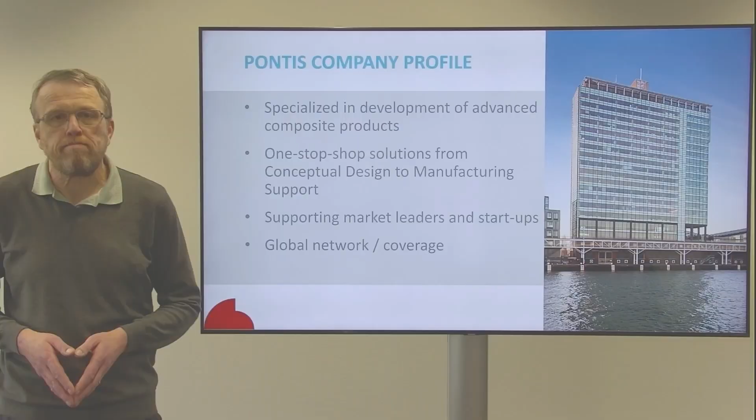Now to the subject of our lecture, composites in mobility, e-mobility in more detail. We are looking at composites that have been successfully applied into the passenger car market for load carrying structures, but also interior panels. But often that was at the high-end part of the market, with the more expensive cars, which could afford to have more expensive materials used for performance reasons.

Recently, BMW has developed the i3, which was a more affordable car and which was produced in larger volumes, which also was quite successful in reducing the weight of a car. It took 30% of the weight compared to a similar vehicle, and was able to achieve quite a lot of CO2 reductions over the lifetime of the car. But a lot of lessons were learned from this development, so it's not finished there yet that we all know that everything can be applied.

Lessons learned from the BMW i3 is that cost is still an issue. There's still a challenge in the industrialized process. A lot of compromises had to be made to implement composites in the car. There's still a lot of manufacturing waste involved. We used fabrics that, for cutting, left a lot of inefficient use of the material, which is quite expensive, so that could use some optimization.

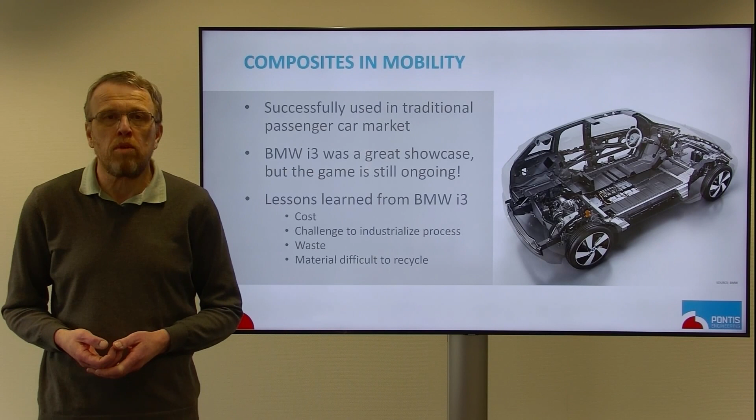And also the material itself, BMW uses thermoset materials, which are usually hard to recycle. So these are questions that still need some more investigation or need to be answered. So there's still some room for development of composites in mobility, and we can look into that in more detail in this lecture. Well, why are composites usually used? Well, to enable a lightweight structure.

If you look at electric vehicles, the weight trend is a little bit different than we would expect. If you look at the larger, let's say, high-end models, the Tesla, Audi, Mercedes, they are quite heavy cars compared to their internal combustion engine counterparts. The Volkswagen ID.3 is 300 kilograms heavier than the Volkswagen Golf 7. This obviously comes because of the battery. So why are these cars not optimized for weight yet?

Well, at the moment, the industry is such that people are electrifying their cars. They want to have an alternative. They want to offer their customers an electrical alternative, so that they are not basically left behind by the competition. So the focus is not that much in making things lighter, but in making things electric. So there is still some room for improvement at a later stage, but it's not the main focus here. I would like to just continue a little bit on the lightweighting part. So the first priority is electrification.

Once that's done, people also are talking about autonomous driving as a priority. Well, this has quite a lot of implications. It's quite difficult also regarding regulations, even the legal aspects of it. So it's not seen yet as the highest priority. So slowly also moving to the area that we would like to do some lightweighting. Well, why would we like to have some lightweighting? Obviously, extend range to make up for the battery weight that you need for that range.

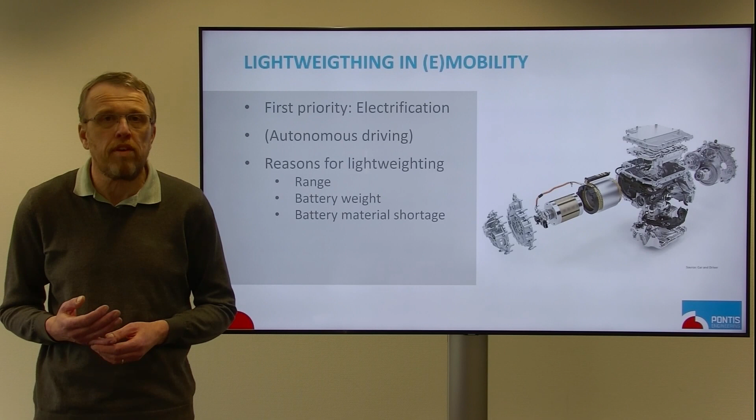But the actual need, do we really need to have this lightweighting? Well, I would like to explore a number of things. The ranges that current cars have might be sufficient.

Nissan has got some feedback from their cars and their owners, and concluded that if you have a driving range of about 300 kilometers, people are not that much concerned about the actual range. The range anxiety diminishes. They actually have sufficient range to do what they have to do, go to work or do shopping, and still have some left to do something unexpected, pick up the kids that got sick from daycare, for example. So that's not too much of a concern once they know they have sufficient range.

So yes, additional range would be nice. You don't have to stop when you go on holiday, but they might not want to pay a premium to get that extra 400, 500, 600 kilometer range from one battery. Also, you compare it with your mobile phone, you can have your car charge overnight and have it ready in the morning for you to start. Manufacturers do not put bigger batteries in your mobile phone because everybody charges overnight and can use it for the full day. Everything extra is nice, but they're not quite willing to pay for it, so they leave it as it is.

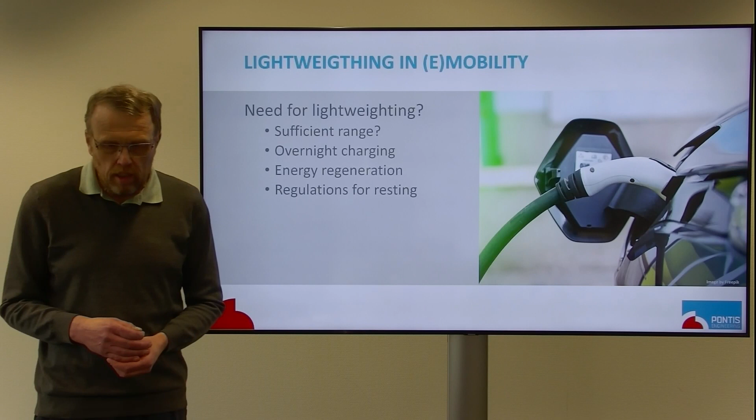One final aspect is the regulations for rest. Professional drivers are subject to rules for resting periods, so they need to stop and take an amount of hours of rest before they continue driving. And during that break, of course, their vehicle can be recharged, so it's not necessary to have a bigger battery to overcome the extended long ranges they do, because they have to stop anyway to recharge. So these reasons make it somehow a little bit less obvious that you would put a lot of effort into developing a lightweight structure. But still, these are not the major reasons.

They are something that plays a role, but if you look at why not more composites are used in cars after the BMW i3, well, one of the conclusions is that composites are still difficult to mass produce in the very high volumes that are necessary for these passenger cars. Cycle times are still too high, there are still too many steps involved in manufacturing, and the material cost is still not low enough to be competitive.

Add to that some risk in implementing a newer technology and the investment that's necessary, which means that companies are quite hesitant to just make the step to the very high volume, low-end cars. So it's usually getting back to the lessons learned from, for example, the BMW i3, implementing composites in a more cost-effective way in the more high-end cars, such as the BMW i7, which now has a hybrid roof structure, or the Audi A8, for example.

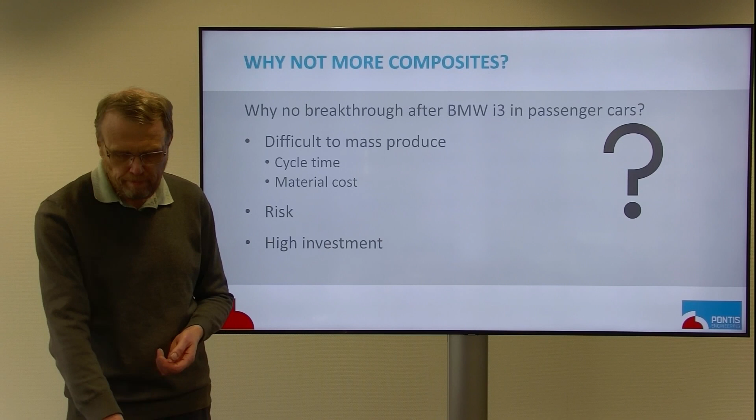Over here is just to highlight what's necessary to get more composites going in, let's say, the high-volume cars. Basically, if you compare it to steel and aluminium, carbon is quite expensive if you look at the right side here, 32 euros per kilogram. Obviously, it can get quite a considerable weight saving compared to aluminium, 30% to 50%, but the premium is quite heavy, 5 times more material price, and also 6 times more of the lightweight cost per kilogram compared to aluminium.

So aluminium already gives you a considerable weight saving at a much lower cost. So that's a competition that's always present with carbon and lightweight structures. So what is necessary to really enable a breakthrough in the high volumes is that we need a manufacturing breakthrough. That can be either by the prices for raw materials coming down, or by making a big step in the manufacturing process, bringing down the total costs. Basically, these costs have to come down by a factor of 3. So there's quite a challenge to be met here.

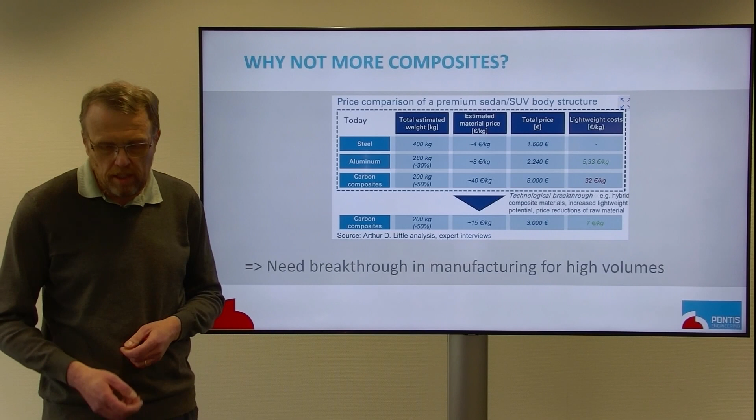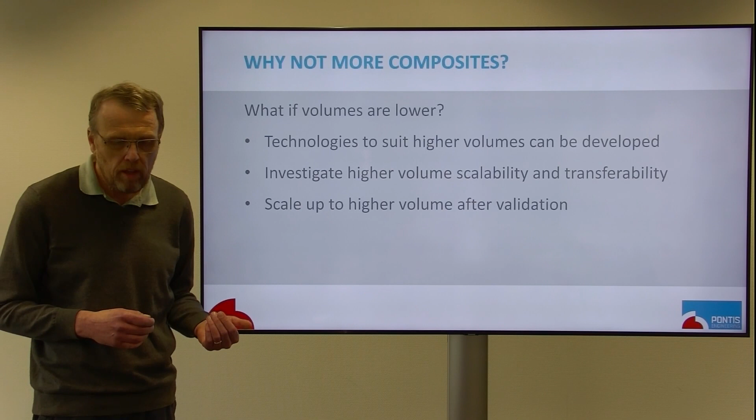And that, I think, would be a step too far if you would just try to implement it in the high volumes that are necessary for passenger cars. So what if the volumes are a little bit lower? Then you could develop the technologies to suit the higher volumes at a lower pace. You can investigate their scalability and transferability into these high volumes, and after you have validated, you can scale it up to the right volumes. This means that you would like to have some development at a slower pace, but still have some business case.

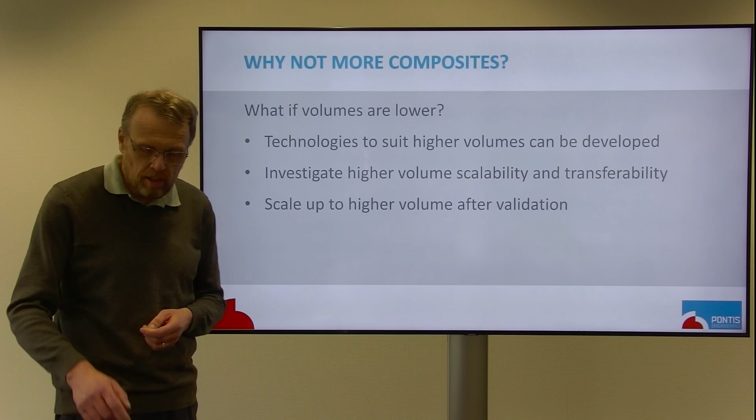Keeping in mind lower volumes, I would like to discuss the next subject, which are the commercial vehicles, electric commercial vehicles in this case. Commercial vehicles are trucks, city buses, vans, etc., that are used for transport of goods and persons for money. They can be used for long distance deliveries, but if you look at the electric vehicles, these are mostly used for last mile delivery into city centers to deliver packages to private homes or goods to companies like supermarkets or other smaller enterprises. A lot of things are happening there.

If you look at it, there's light electric vehicles. This is the latest area of interest, in which very small micromobility, stand-up scooters, bikes are used to deliver people and goods into a city. There's a lot of change going on. Compared to passenger vehicles, which really require design and manufacturing excellence, and you can really not afford to miss a lot, there's still a lot of development in the e-vehicles on the commercial side, because the best solution has not been clearly defined yet. So there's a lot of interest there to develop that solution. That also shows that it's seen as a market with large potential.

If you look at initial public offerings, where companies raise money for development of their products, in 2021 there were 3 big initial public offerings, where Arrival, a company from the UK, raised 11.5 billion euros. Ebusco, a bus manufacturer in the Netherlands, raised 1.3 billion euros for the development of their lightweight bus. And Rivian in the US raised over 10 billion to develop a van backed by Amazon, for last mile delivery. So there's a lot of potential in this market. At least investors see that. So there are quite a lot of interesting prospects for commercial vehicles.

They are interesting because, contrary to the Tesla I just mentioned, that only had 0.6% of energy consumption with the extra weight, which doesn't much matter to drivers, and they're not willing to pay that much for it. But if you look at a commercial vehicle, like a 3.5-ton last mile delivery truck, which has a limit of 3.5 tons, making that vehicle 200 kilograms lighter means that you can bring 200 kilograms of payload more with you, which allows you to have an increased efficiency of your vehicle. If you make a bus 1,000 kilograms lighter, that makes it more available, so also increases the efficiency of your vehicle.

For commercial purposes, that translates directly into money, and money can be quantified more easily than the perception of just having a longer range. So it's much easier to quantify and justify the investments. But still, there are some challenges that have to be overcome to be able to develop these vehicles. And this is what I would like to discuss in the next few slides, which is the volumes involved, the requirements that are involved for these vehicles, and also the processes and their industrialization level.

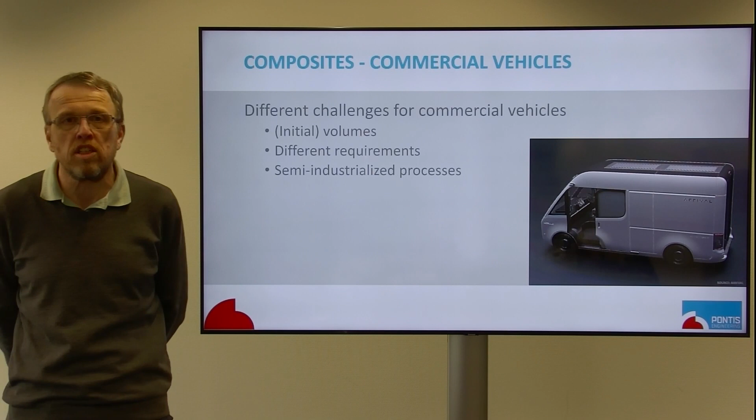If we look at the volume in the market size, especially the volumes, the initial volume for commercial vehicles is significantly lower than the passenger car markets. Tens of thousands, hundreds of thousands are the usual there. For commercial vehicles, the typical product volume is 1,000 to 10,000 parts. That requires a different level of investment, but also opens the way to develop new concepts.

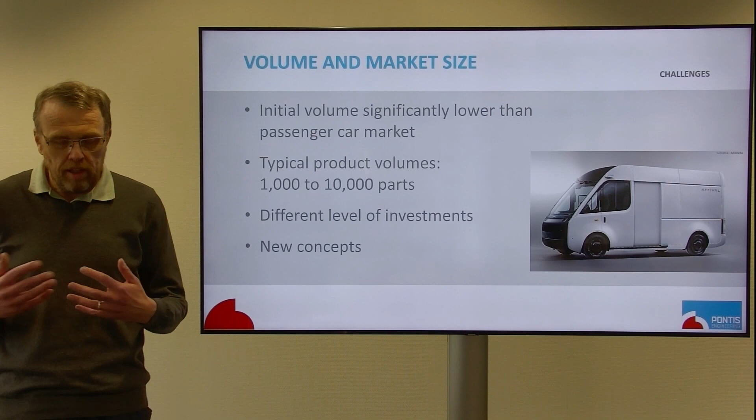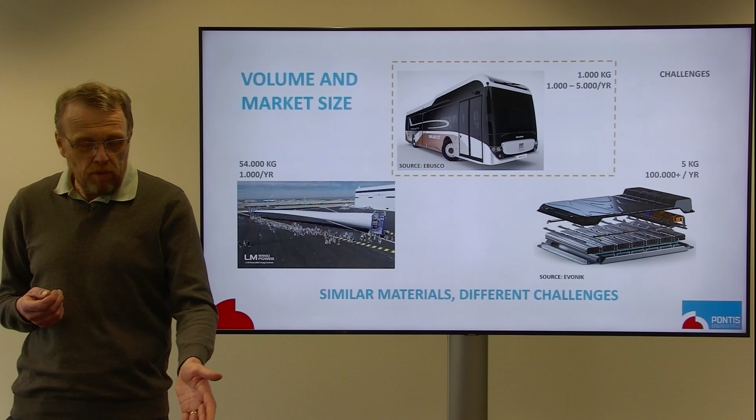And just to get an idea of the challenges involved in that part, I would like to look at a few different examples where similar composite materials are used, but different challenges exist. And these are similar to what you could encounter when developing a commercial vehicle in composites. I would like to discuss a blade from a wind turbine, a bus, and a battery cover.

First, a wind turbine blade. The one you see on the image is one of the biggest commercially manufactured blades currently in production. It's 107 meters long. It's mainly made of glass fiber with carbon spar caps to give it some more stiffness. It weighs 54 tons, of which 10 tons is the carbon, and it's produced about 1,000 a year, so let's say 3 a day. This obviously gives you some challenges on how to manufacture such a large single-piece composite part. You have to make choices on how to do that and how to make that efficiently.

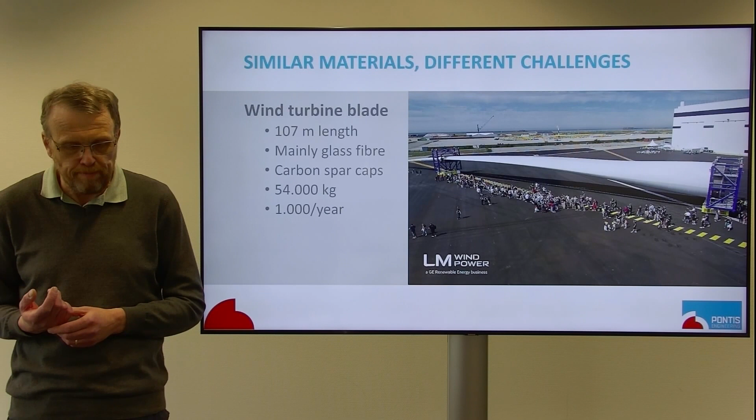If you look at another structure, you would make different choices. For a composite bus, that's a carbon fiber structure in this case, of about 1,000 kilograms compared to the 50 tons of the blade. That means that you can choose different manufacturing technologies to make about 1,000 to 5,000 pieces a year, which is quite a different number, but still very respectable.

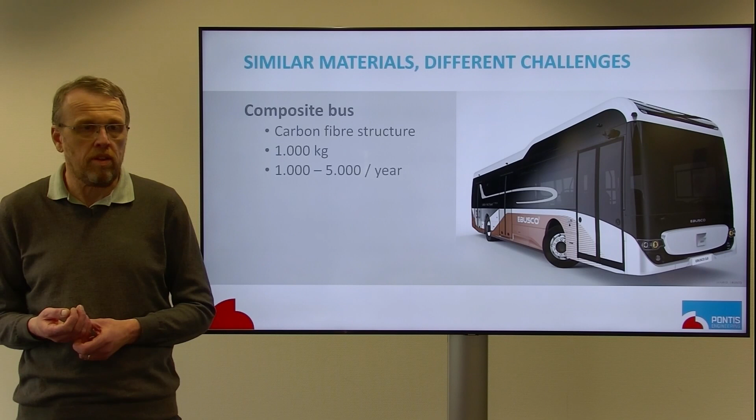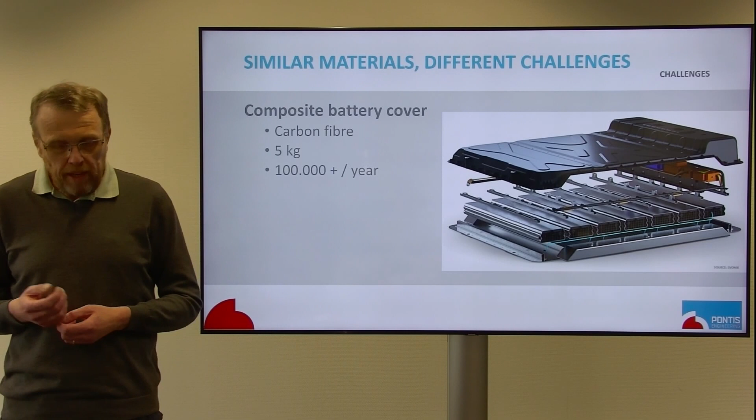If you look at battery covers, these are typically more high volume parts. Carbon fiber, 5 kilograms, so they're small, lightweight, reasonably small mass, and you can choose other processes that you would never dream of using for a wind turbine blade. So again, you have to play with these requirements and the challenges that are there to match them together and get a good product. Making these choices is part of your development phase. So that volume, depending on the choices you make, also can be looked upon in the development phases of your product.

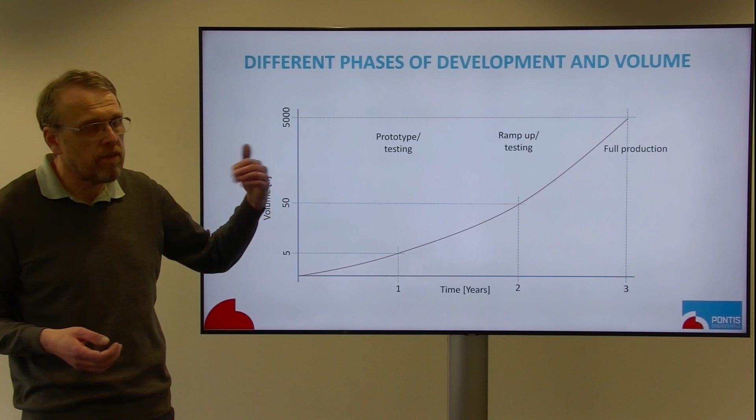Once you validated your concept and met your goals, you would like to scale it up. You would like to make in the second year perhaps 50 units to do some prototype testing, some further validation, and also work towards certification. That involves also time and money. And all the time, investors are looking into it, whether you are still developing and delivering on your promise. So you need to make sure that they are happy too. And then you have to make another step into full production, which requires 5,000, 10,000 parts a year. And that also requires quite a considerable investment.

So that requires a lot of effort, not only from a technical point of view, but also from a financial point of view. If you are a big OEM manufacturer, BMW or Renault, then you should either have an infrastructure, perhaps even an RTM setup that you use, or you at least have the backup and the funding, the deep pockets that are necessary to put something in production. If you're a startup, that's a completely different issue. So that's also a very challenging area.

We've seen that even Tesla has had a lot of trouble ramping up their production. Rivian and Arrival, which I mentioned in the IPOs, are also having trouble financing their ramp up, and after these big IPOs where they raised a lot of money, they still need more. That's not uncommon if you're stepping into the automobile industry, but it is quite a part where a lot of companies could fail. So that's also quite a challenging environment.

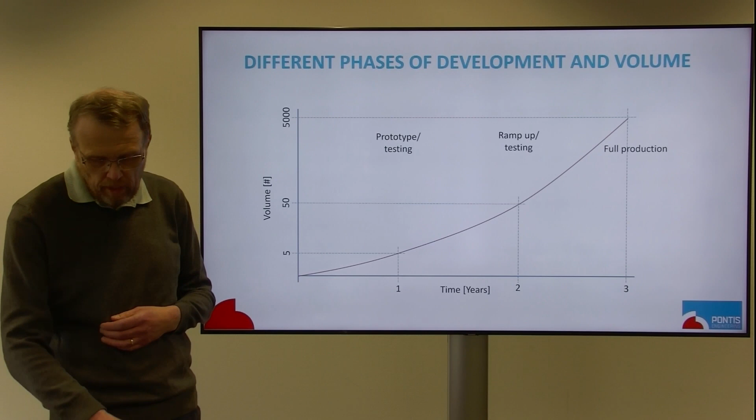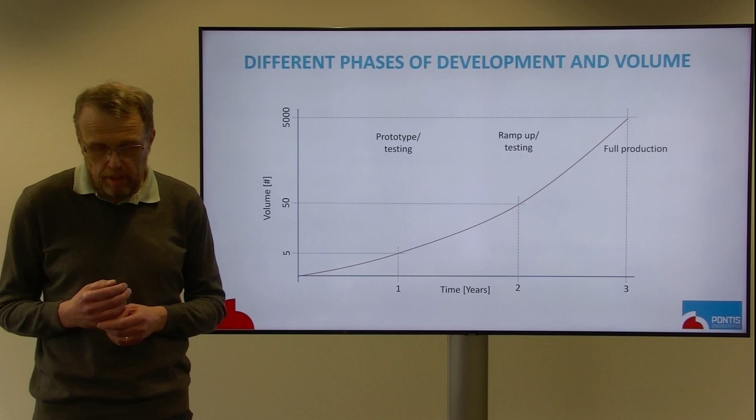If you look at the proposal to just scale down on the development, develop a technology and scale it up later, having basically a phased approach for high volumes, you really have to keep scalability in mind. That is also important because then you can afford to do this development.

Looking at the second bullet point I mentioned, the different requirements, there are also quite some challenges to be met. Local manufacturing is one of them. If you want to sell buses, usually the local authority you're selling to, a city or a country, will ask you to do something in return by having the vehicles manufactured in their area to support the local economy. That means you have to change your logistics.

You cannot have one big factory in which you manufacture all your products efficiently. You will have to either transfer some of your manufacturing to another area, or at least build your vehicles in sets that can be assembled locally. So that does not help in getting an efficient manufacturing process, especially with the low volumes involved for commercial vehicles.

Also, these smaller series require you to have a flexible and agile manufacturing process, because there's a lot of variation in these designs, but also because of the short runs, you have to be able to switch over to new production quite quickly without investing a lot into new equipment or setup. Not only should your process be able to cope with that, but your entire organization, from an organizational and logistics point of view.

The third item here is sustainability. This is becoming more and more important. One important demand from OEMs and their customers is demand for sustainability. Customers want to know what manufacturers are doing for the environment. They want a sustainable product, a recyclable product, but even better would be if the product were circular, so that the product is recycled to be used in the same way it was before, meaning you don't need any more raw materials for a new product.

Solutions are being developed in that part. Often you hear composites are hard to recycle. Yes, thermosets are not the easiest materials to recycle because they're quite durable, but the industry is addressing that. There's already, for glass fiber, quite a good way of recycling via the cement kiln route, where your glass composite is used as a raw material for manufacturing cement, saving on energy compared to new cement. There are also thermoplastics that can be recycled into raw material. I'll talk about that a little later.

There's also an interesting development that has been gaining much more interest lately: reversible thermosets, whereby some chemical modifications of, for example, epoxy, make the material behave as a thermoset at operating temperatures, but at raised temperatures there's a chemical change that makes it processable like a thermoplastic, which is much easier to process and recycle.

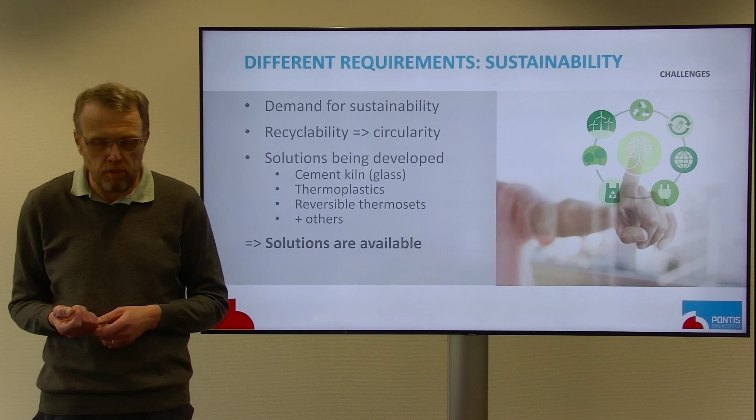The final challenge I mentioned was semi-industrialized processes. You have to have a scalable, automated, transferable process that is flexible, because you have to adapt to limited volume and local requirements. For that, you are developing new processes, hopefully based on some industrial process, but you will always make some modifications to suit the new product you're making. You have to take into account that there will be some effort necessary to bring it to the desired industrial level. That's also a challenge to keep in mind when developing that product.

That makes it a little bit complicated, but again, like I mentioned, looking at the small volumes, you can still experiment a little to optimize the process and make sure you have a product that is really fit for purpose.

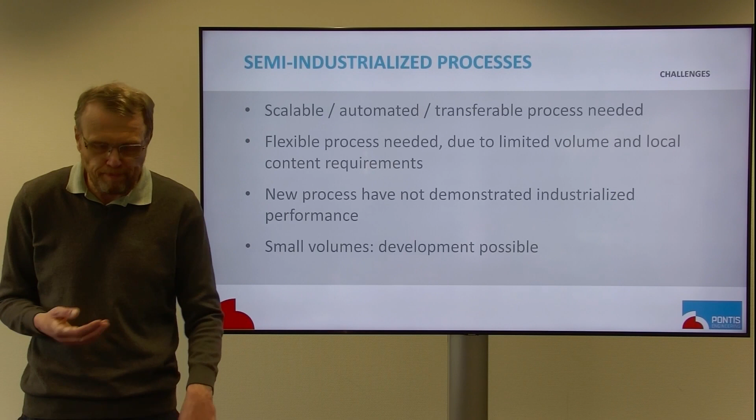I'd like to highlight just two examples on how these challenges were met and some aspects of those. The first one is Arrival.

It's a UK-based company that has built a clean sheet delivery van. They also work on buses and trucks, but the main focus is on the delivery van. They use a metal space frame, composite body panels using thermoplastics, and they have made a clean sheet design also with a modular approach, so variations in the size of the vehicle are easy to implement.

Using thermoplastics, they use a combination with metals. They use a pressing method, which they call a multiform pressing method, in which you can quickly press the panels at a low cost and just attach it to the car.

They make sure that they already have the final surface finish incorporated in the panel, so they don't have a paint shop. They do this using a microfactory approach. Basically, they use digital cells, small robot cells that can do all the operations, the assembly, and these are quite flexible to be set up in existing factories or locations, so they can put these cells where the production needs to be, and they don't need all the transport involved, and also can meet local assembly requirements.

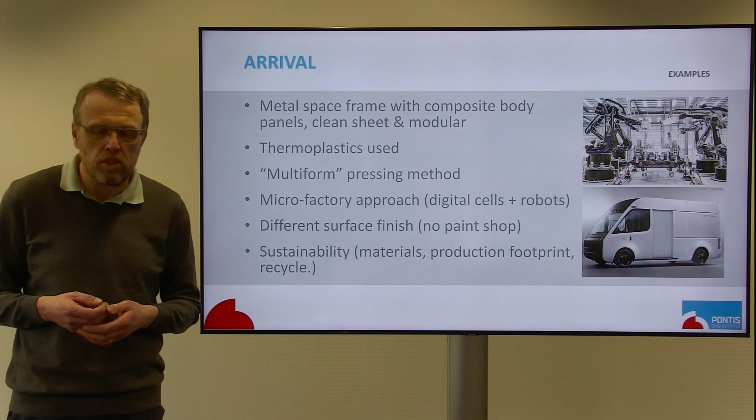They also have taken sustainability into the design, so they look into the materials they use and the material waste, the production footprint, what the effects are there, but also incorporated all types of recycling streams into their production. So they make sure they try to tick all the boxes that are necessary to have an efficient and, let's say, innovative concept.

The second example I would like to discuss is Ebusco, a bus manufacturer from the Netherlands. They built a metal bus currently, but they also have developed a composite bus which uses a carbon space frame, which compared to the metal product achieved 32% weight reduction.

They use mainly carbon for their structure, some glass fiber as well. And they used aerospace manufacturing processes as a manufacturing process, but not at the aerospace price. They have translated it into a more affordable, efficient way by making smart choices on how to implement that.

The technologies they use are overbraiding, which is an automated manufacturing technology, in combination with RTM infusion for their structural parts. But they also use pultrusions, which can be reasonably standard parts that are all manufactured in an automatic way. By combining them, they can make an efficient structure with weight reduction for their additional range.

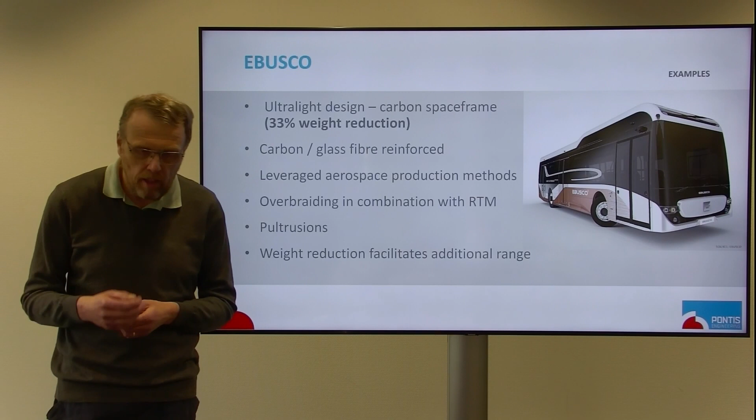These two are different concepts that tackle similar challenges. Especially Arrival looks at the recyclability that they're designing for from bottom up. They both need a scalable process. They both are ramping up production and need to be able to cope with that, and the process needs to accommodate that from basically day one.

Also, to ensure scalability, automation is involved in both examples. Local footprint, especially at Arrival, is quite a strong one, but the use of automated processes and standard profiles enables it also to be possible to have a more flexible approach. Both processes are quite agile and flexible for manufacturing.

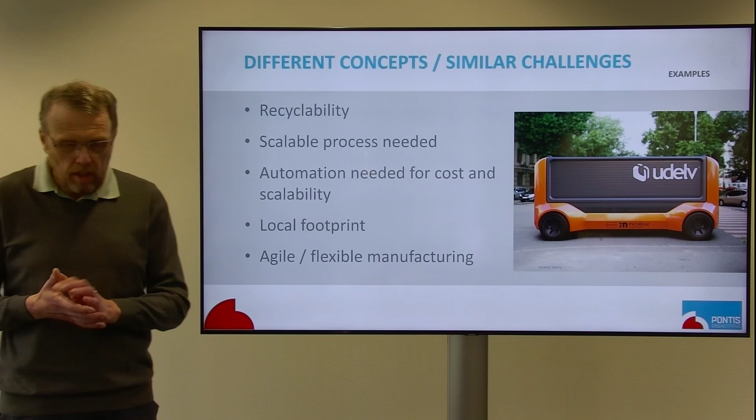So what did we want to achieve with that concept? Basically, we want to have hybrid manufacturing techniques and materials, because we do not want to constrain ourselves to one material, as that poses some restrictions. So we want to use the right material where necessary, whether that's thermoset, thermoplastic, or even metal, to make the right use for the structure.

We favor quite strong liquid thermoplastic materials, I'll talk about the advantage a little bit later. We also want to use integrated pultruded profiles, again because of the automation and the modularity of those parts. This modularity and simplification of parts enables production to be either done or just assembled locally, which allows some flexibility for manufacturing process development.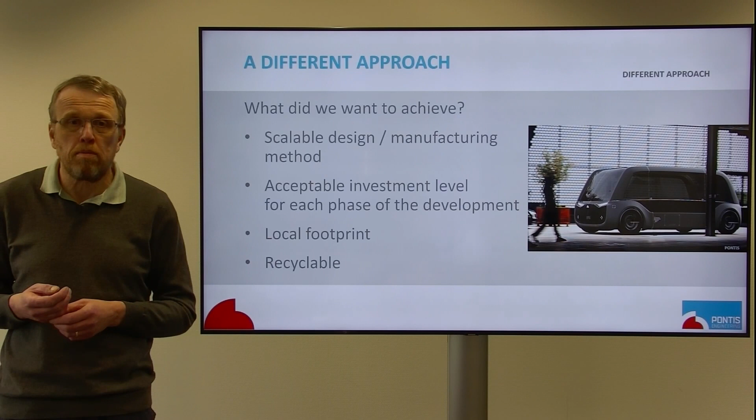And also, from bottom up, the components should be recyclable. The entire vehicle should be recyclable.

Our approach to achieve that is that we want to use hybrid manufacturing techniques. We do not want to just focus on one material, but we want to use the right material for the job - that could be thermosets, thermoplastics, or even metals, or a combination of those. We strongly favor the use of thermoplastic materials, for reasons I'll explain a little bit later.

Use of integrated pultruded and braided profiles, because they can be quite easily manufactured automatically, is also something we envision. They also help us produce and assemble locally. You can either build your sets and kits and ship it off to be assembled locally, or, because they're quite simple processes, you could produce them on site or close to it. Again, we take into account that the entire structure needs to be recyclable in some way, integrated already into the design.

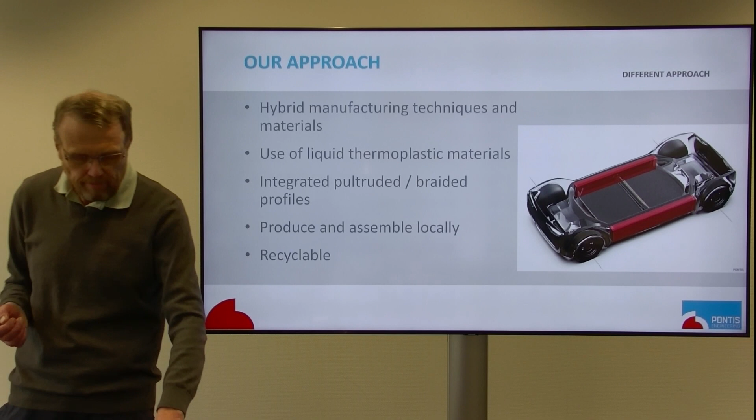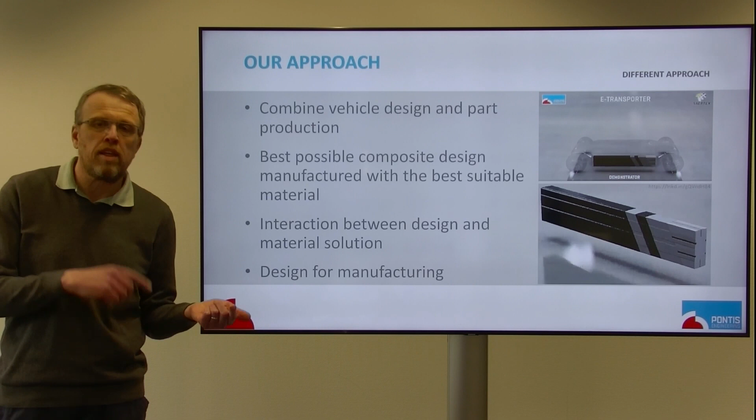For that, you want to combine the vehicle design and part production. You have to really make the best composite design and use the best suitable material. For that, you need interaction between design, the material solution, and the application. So basically, you need to design for manufacturing so that after you've designed, you don't have to translate the design into manufacturing, but have that already built into the solution.

As I promised, some more details on the liquid thermoplastics we envision. We think that's quite an interesting area that can solve a lot of problems. Liquid thermoplastics can be used for the infusion process, and we can combine these with inserts and prefab parts. The liquid thermoplastic we're referring to, brought to the market recently, is Elium by Arkema.

In the past, liquid thermoplastics were available, but their processing temperatures were quite high, over 150 degrees or more. That required quite some investment in tooling, for example, and was also a more energy-intensive process. So that was not an attractive option to develop components.

But since this new resin became available on the market, one that can be cured at low temperatures or even room temperature, costs can come considerably down to use thermoplastics. Then you can take advantage of the properties that make it an attractive part, which is recyclability.

Arkema has built-in recyclability, basically meaning they can either repurpose the material as pellets in injection molding, or they have a route in which they can reclaim the matrix material and use it for manufacturing virgin resin material, which is a better solution because that makes the entire component circular.

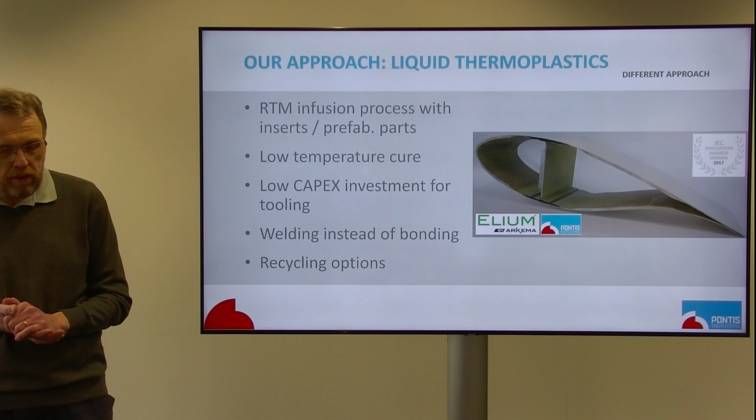One final very interesting and attractive aspect of thermoplastics is that they can be welded instead of bonded. You don't need an adhesive that requires surface preparation and cure time to join a part. You can just use welding by heating the material and pressing it together to assemble a part, which can considerably shorten assembly times and increase the efficiency of the assembly process. All in all, quite an attractive way to consider applying to your product.

Summarizing, I cannot give you a single solution for all commercial vehicle concepts because they're quite different and have their different needs and challenges. But there are a lot of solutions available, so you really have to understand and choose the right one that's proper for your product.

Whatever it is, the composite business will need to show that it's robust and competitive. It needs to be able to fulfill a need. You might need to do a phased approach, not jumping straight to full series production of high volume in one go, but instead taking a step back and doing it in the lower volumes of commercial vehicles.

But you can also consider designing with possible implementation of composites in the future. Consider designing a metal part and then translating that at a later stage, once you've ramped up your production, into composite parts to achieve weight reduction.

If we want to implement composites in the high volume passenger car business, a technological breakthrough is necessary. Prices have to come down, either through materials cost reduction or a leap in manufacturing processes to bring down cycle times. That is still a challenge, still work to be done.

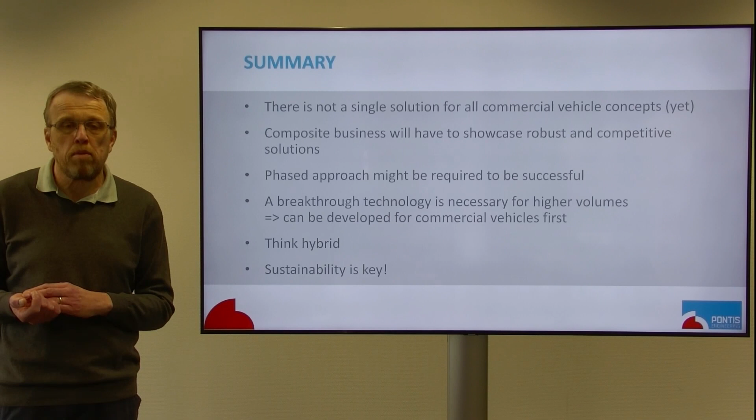If you're developing parts, think hybrid, don't limit yourself to one single solution or material. And obviously, with everything you do, sustainability is key. We need to keep in mind that we have to have a sustainable, circular solution to be able to keep developing ourselves and create a greener world.